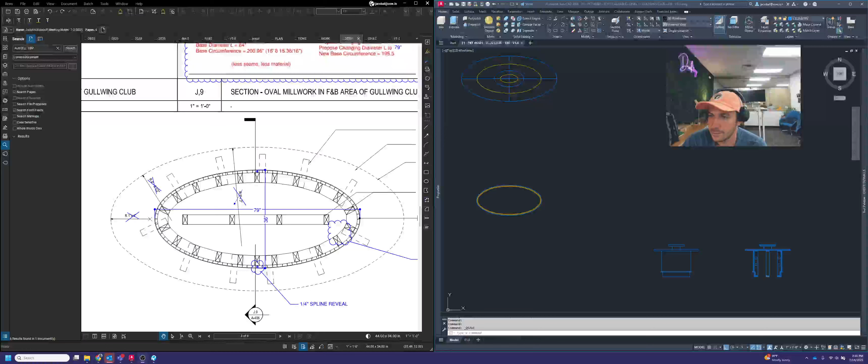All right, we are going to finish this one out. We've got our 2D section view drawn up, and our plan view kind of slightly detailed out. This may take another part or two to get through the entirety of it, but the goal for this video is taking that section view and turning it into a three-dimensional object that we can use for our drawing.

We did mention this previously, but I want to bring it up one more time. Anytime you plan on making a 3D model off of a 2D drawing, like what we're doing here today, you need to make sure that every single part you're going to be making in 3D is a closed polyline.

That can be a little tedious at first, but we're going to remove any hatching here. I just exploded this block, making sure I have the full plate. Just like we did over here, you can see that bottom plate sticks into that rib a 1/4 inch and the rib sticks into the bottom plate a 1/4 inch. So I'm using that block that we used to make the die wall, and adjusting it here and there slightly to make this work.

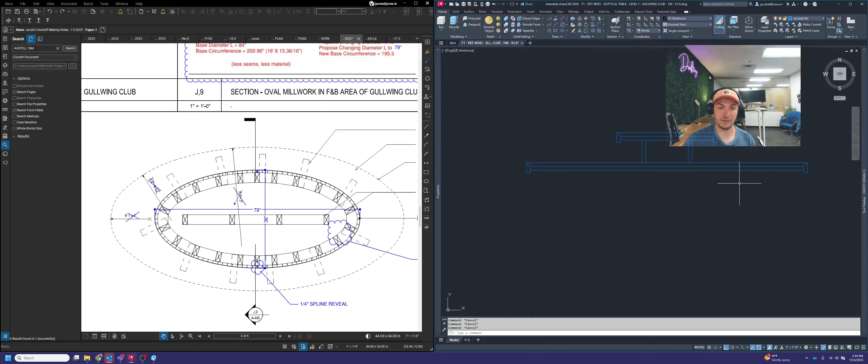Like this. Okay, and then when you have that complete, where all of your lines are touching each other and everything's closed up looking, what you want to do with that information now is use your bpoly command. Again, that's bpoly, like the letter B and then poly. You go into there, hit pick points, and you're going to select all of these points here.

All right, I left this spot intentionally blank for right now. We're going to actually adjust that too. So for something like this, how tall is this? We got to check something here. It's about 4.5 inches tall. Just trying to think out loud.

What is going to be the most beneficial thing we can do to build this out, to frame it, to make it actually stable? I'm tempted to make this a ladder frame, because of how small it is. I think that may be the best approach. Why don't we start by thinking about it as a ladder frame?

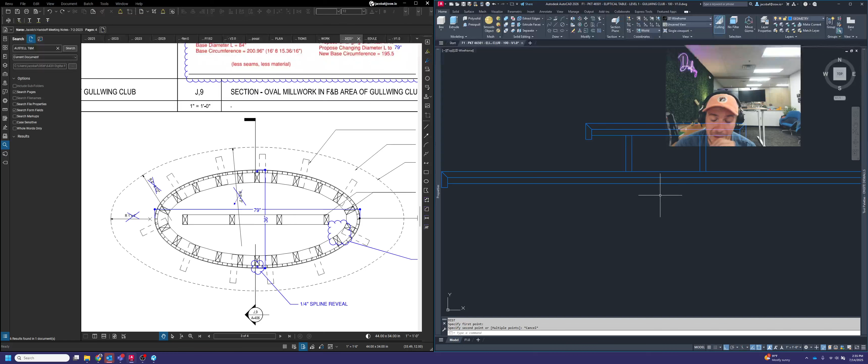And what I mean by a ladder frame is kind of like taking a die wall and flipping it on its side. So to illustrate that, if I take this plan view of that area, so these are the panels that are below that countertop, and I offset that in 0.75. Again, this is just to illustrate it, you don't have to follow along with this.

What we're going to do is take a line and offset at 0.75. And we need to raise that up. So really that's kind of give or take, it may not be perfect. I might actually end up changing this a little bit more.

I think I might. I think I'm going to. I'll bring that other line in 3/4 of an inch. So right now, that's our panel line. This would be the outside loop of our framing, which again is kind of arbitrary, it's not exactly right yet. So I'm going to see what I can do.

This is going to be a very small place to put framing, so I'm going to do my best to try to make this right as much as I possibly can. But it's going to be very, very small in here.

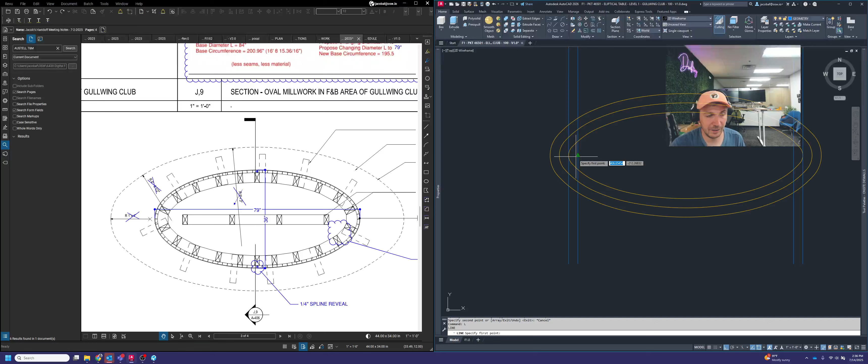If I have a rib here and a rib here drawn in blue, what I want to do is use the line tool in combination with mid between 2 points. I'm making sure that I'm drawing a path that goes from the center of the rib on the left to the center of the rib on the right. Then we're going to use the array path command to array this across.

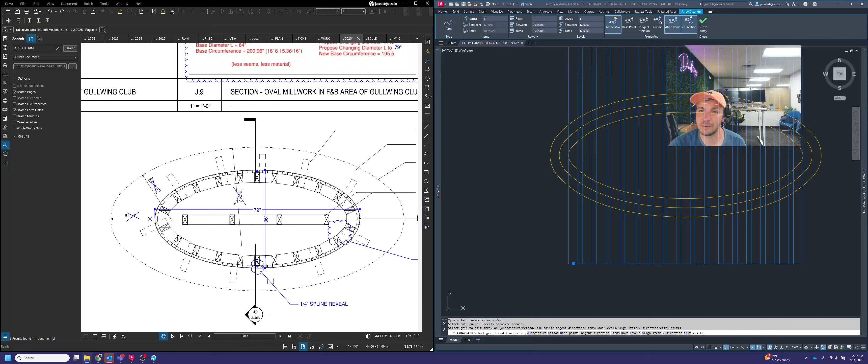One thing to keep in mind is that we're going to refer back to our drawing from earlier, from the die wall training, where we talked about how to handle rib spacing on a die wall with curves. Let me pull that up again real quick, since we're going to need it again in a minute anyway.

Curved panels, curved die walls. Here we go. All right, when it loads, there it goes. So again, we looked at this the other day. We're dealing with a curved wall, and I will assume at this point that we're using 3/8 bending stock for the wall.

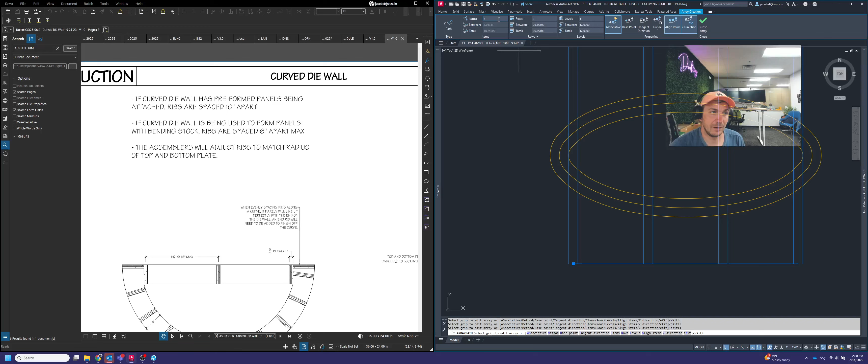If we assume that, we're going to use the rib spacing of 6 inches apart max for that. So when we go up here, we're going to switch this to divide. Then we're going to make sure that our ribs do not go past 6 inches apart. Right now we're just barely over, so we're going to put one more rib in there.

Now it seems like overkill — these are only like 4.5 inches apart. But honestly, it's better to have more than to not have enough here. So what I'm going to do is trim these back to show you what that ladder frame will look like. Typically, when you have a ladder frame, you're not dealing with a curved face like this.

This is kind of goofy, but we have these ribs here, so we've got 5 in total — these are spaces in between, 4 spaces between, 5 ribs total. We have a piece here that's 3/8 bending stock, double layered, making the outside perimeter of this. Then you have your panels covered in that MT1 or ML1, in our case, for the outside — these panels on the outside of that.

So that's kind of how I want to go about framing that. I know it's probably not the best thing in the world, but it's probably the best I can do with what I've got here. So if I'm going to draw that as if I'm framing it that way, what I need to do is draw in those 2 layers of 3/8 bending stock.

In this case, we can draw it as a 3/4 inch thick block of material, so 0.75, and make sure that it's not going into my countertop like that. So again, I'm using the rectangle tool to be able to do that.

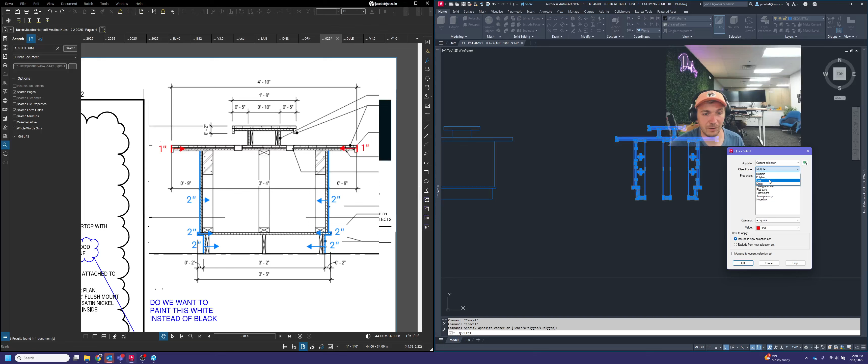And then we're going to delete those lines. As long as everything is a closed polyline now, or a circle, that means we are good to move forward and start making our model. So here we go, here comes the fun part.

So when you're dealing with a model, especially if you're sweeping, a real important thing to remember is that I'm sweeping this and it's a weird shape. Because of that, I need to make sure that whatever I'm sweeping does not intersect itself as much as possible. If AutoCAD senses that an object is interfering or intersecting itself as it's going around a curve, it'll probably give you an error code.

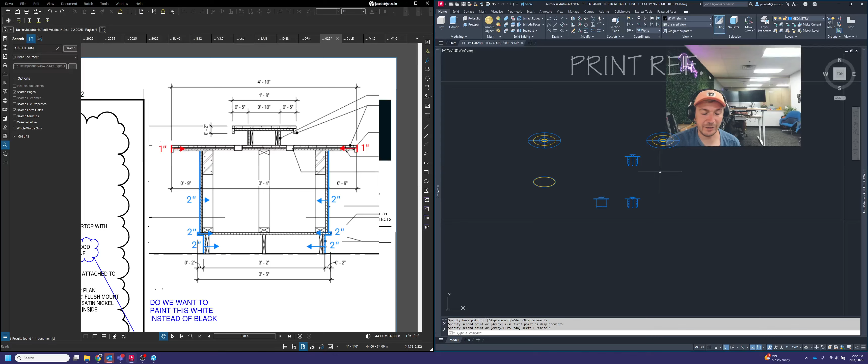In that case, we might have to try a different way to go about modeling that table. So right now, what I'd suggest is we start with our section view that we just made. So we're making a copy of that off to the side, and we're copying our top-down view. Then we hold down Shift and our middle mouse button and go into an isometric or axonometric view where we can see everything at an angle like this.

You can also click on the corner of your view cube if you prefer that. It doesn't really matter too much, but it's just a way to see multiple planes instead of just the two X and Y planes. You want to see X, Y, and Z here, over here like this.

So we've got a copy of our section view. That's perfect. What we're going to do now is get ready to sweep this. Going back to what I mentioned before about making sure this doesn't intersect itself, probably the best way to do that in a case like this is you probably want to...

Almost take half of this section view and paste it off to the side. So let's do that. I'm going to have to redo some of my B-polys, but that's okay. What I'm doing here is trimming anything that's outside of this middle. And I actually don't need these ribs because they're not going to be curved.

There's going to be a straight run of ribs in the middle, so I don't need to worry about those. Anything past that line, I'm just getting rid of it altogether. It's not needed, I just need what's over here on this side essentially. Anything I had trimmed to this line, I now need to close these polylines.

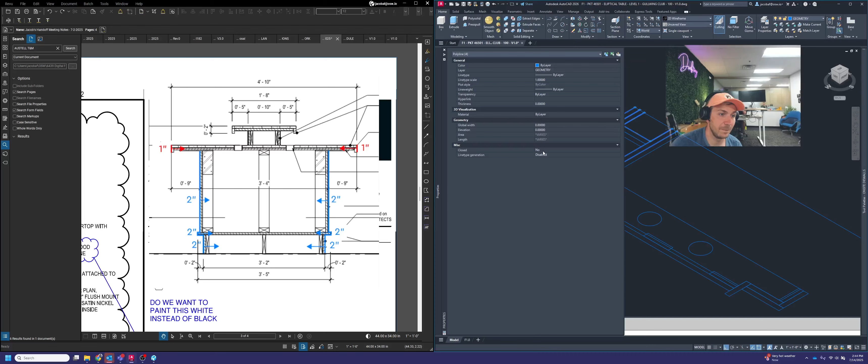Okay, it looks like it did it. Sweet. So now that we have that, we need to flip our section view so it's facing the right way. I'm going to make another copy of that too, not to be paranoid, and I'm going to save too. Good idea when you're working in 3D, probably save often enough so you don't lose any of your work, especially if you're putting a lot of time into it.

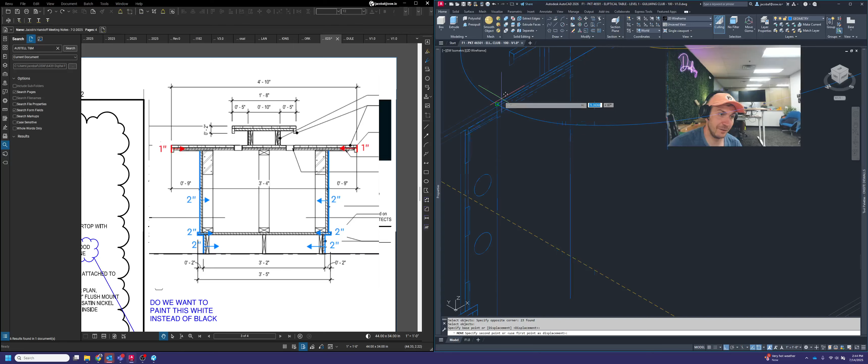So let's use the 3D rotate command, and we're going to rotate this section view, only the one. We're going to flip it so it's standing straight up and down like this. Then I need to move that section view so it's lined up with the edge of my counter right there.

Shoot, I just realized something else too. I'm going to have to do two different sweeps because I'm not going to be able to do this with the one here by itself. I need to do this separate from this one because this one is a different curve than this one at the top. So that one at the top, let's just leave it be for now. I might actually even delete it just for temporary purposes right here.

And I'm going to use... man, oh man, this is getting real complicated. Okay, so I take that back. I need to actually do maybe 3 sweeps even, because this wall should actually be in line with this yellow profile here, okay?

And if I go back to my top-down view, you can kind of see what's happening. As the table goes around, this actually grows in depth and this shrinks in depth. So that means I'm not going to be able to use the same sweep path for everything. But at the end of this, it's all going to come together though.

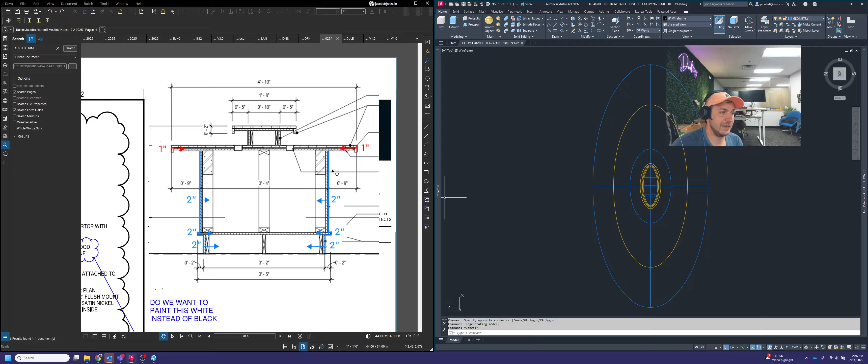So you can even see proof of that here. This is 18 inches at this depth. And then if you go over here to this section view, they show that at 9 inches in depth. So they're actually intentionally making this not line up, which is kind of weird, but we can work with it.

First things first, because we want to sweep these as separate entities, let's go ahead and focus on one at a time. I'm going to sweep the die wall here first. So highlight just the die wall. Do not select anything with the countertop. Just highlight the die wall.

Hit enter. It's going to ask you to select a sweep path. But before you do that, anytime you use the sweep command, please remember that you always want to make sure these two settings are correct down here. So the first one is alignment. Alignment is always going to say no.

If alignment is turned on, or it says yes, what will happen is AutoCAD will try to automatically align your section view to be perpendicular to that curve. Sometimes it doesn't always do the best job of that. I've had it sweep an object flipped upside down or mirrored backwards, or it does some really weird stuff. So because we've already aligned it to that path, we don't need it to automatically align it for us. So we're going to say alignment, no.

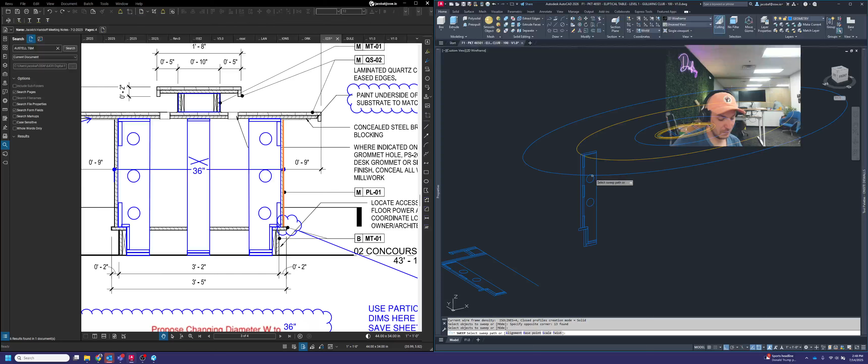All right, so sweep. Select your die wall and all the components related to that. Say alignment, no. And base point is going to be where that profile meets the path. So right there.

Now you're going to be able to select the path. And as long as everything goes according to plan, it should generate a 3D model of your die wall. Now let's just make sure it actually worked. It may have had an error, so I'm going to check and just make sure. Yeah, I think I might have had an error on mine, so let me try it again.

See, unable to sweep 13 selected objects. Okay, why don't we try this then?

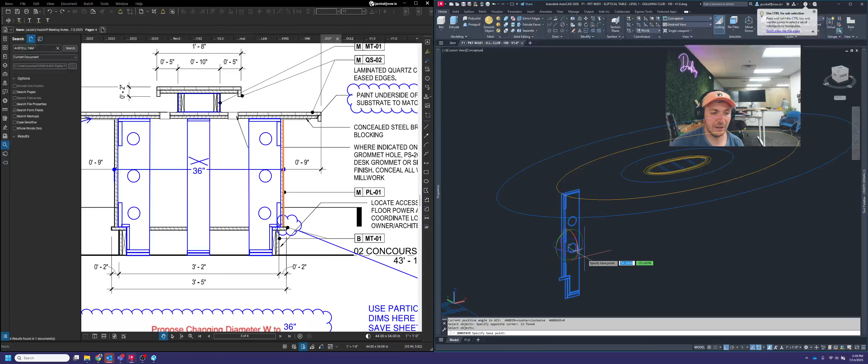Why don't we try to do a 3D rotate on the die wall. And then we're going to move this die wall to be at this corner here and try it from this side and see what happens. It may still fight me on this because this is a very tight corner here. And when it starts to overlap, then it starts to become an issue.

If it still does it, okay, actually it looks like it worked. Okay, well how about that? We got it to work. Okay, nice. So I guess just changing the way that profile was stacked on the path was enough to be able to trick it into working. And sometimes you got to do that with AutoCAD. You have to baby it sometimes because it doesn't always do what you want it to do on the first go.

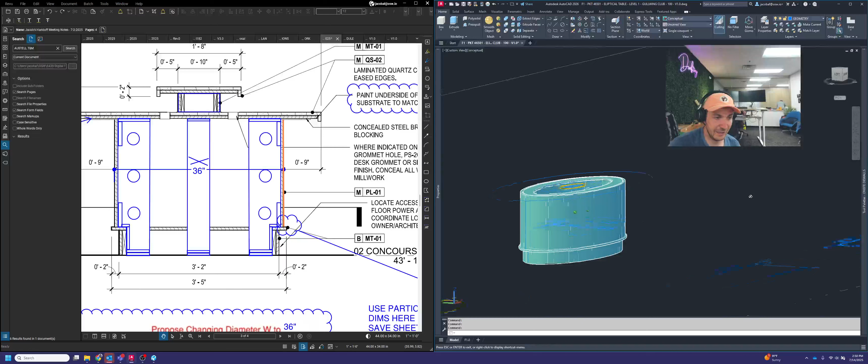So, all right. Now that we have that, our next objective here is going to be to start working on the next portion, which is the countertop. So the countertop, again, we're going to try to use the sweep method on that as well and see if we can get it to work. If we cannot get that to work, then I have other methods we can give a shot to. So we'll do that one.

We're going to copy the countertop components here. We're going to paste those over to the side. And then just like before, we're going to use 3D rotate to align these to be standing upright. So like this, and then like that. So that way we're facing the long side of that path.

Okay, and then what we need to do is just move this set of objects over to our path. So using that corner there to this corner there, just like that. I am also going to raise this up so that way it's not intersecting the framing that we have down below. So let's go 1.5 up.

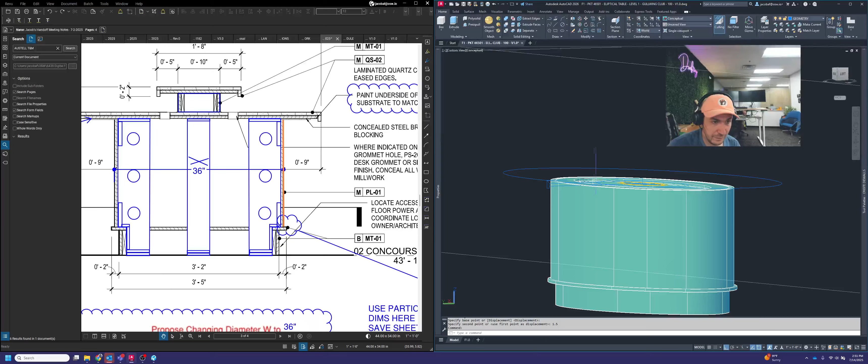Okay, that looks really good. Now let's give it a shot and see if it works. So here we go, sweep. Oops, sweep. There we go.

Select your objects, don't select your path there. Go ahead and enter, then select your alignment and set it to no. Your base point, select that corner there. Now we can select our path, and it says that it's got a problem.

Okay, quick way to fix that. If you're dealing with a shape like this, sometimes it helps if you bring that countertop in a little bit. It's going to sound dumb because you'll end up with a hole in the middle of your countertop, but I shrunk the countertop in closer to the path so it has less chance of overlapping or intersecting itself as it goes around.

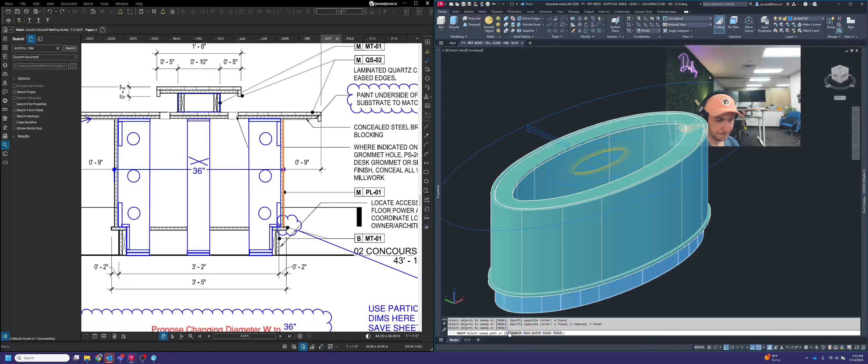That way it does work occasionally. It may help with tricking AutoCAD into making this work. And then I'll show you a nifty way on how to make it actually work right. So we'll bring this a little closer and try it again.

Man, it's still fighting. It really doesn't like this path or this set of objects for some reason.

But like I said, if we can't get sweep to work, there are other ways to make this happen. I just like sweep a lot, I think it's one of the more convenient tools in AutoCAD for this type of thing. Oh, it says it's not coplanar, so let me try something here.

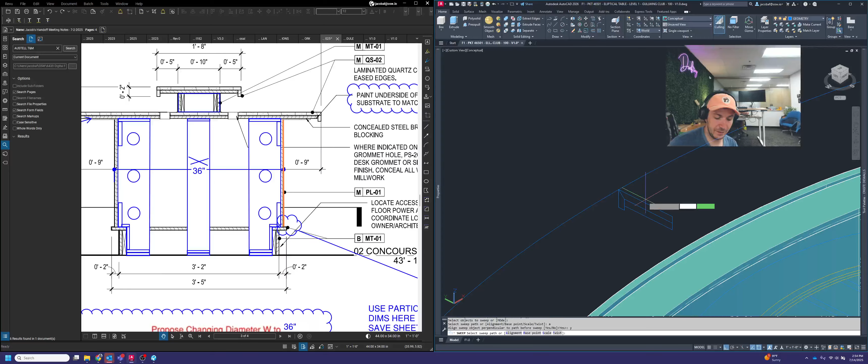It looks like it's lined up perpendicular to the path. Let's try it again. Let me try it with alignment turned on and see if that does anything different. Oh, for some reason that worked. So we were able to make that happen.

Now, when it comes to the middle part here, we have some cleanup work to do, because you can't have a hole in the middle of your countertop like this. So we got to fix that.

To fix that, let's just go ahead and isolate these two parts, the rings around Saturn here, so isolate those guys.

Then we can do a couple of different things. Let me try to think what's going to be the most efficient way to fix this. Let me try this method first: there's a command called solid edit. Solid edit is a command that lets you essentially edit solid objects in AutoCAD.

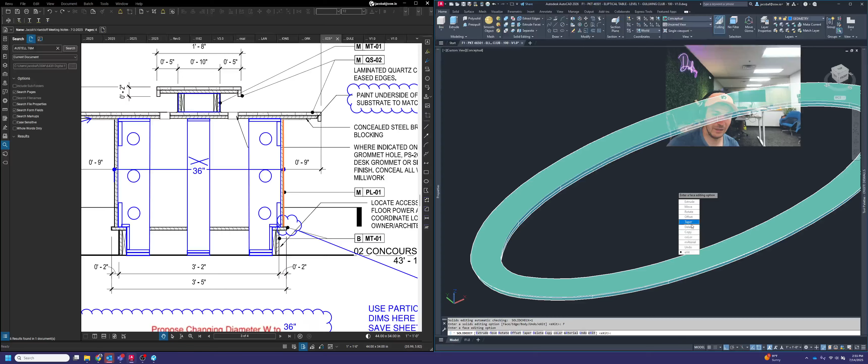Now, if you have something like this and want to remove the middle, sometimes you can go to remove face and hit delete, then go around and select the parts you don't want. As long as it doesn't break AutoCAD, you can actually turn this back into an elliptical shape.

Let's try it and see what happens. Hey, look at that, it worked out just fine. Okay, so that was solid edit, and solid edit will work for this.

So we're going to use solid edit again, and we're going to say face to remove the inside face, and then hit delete.

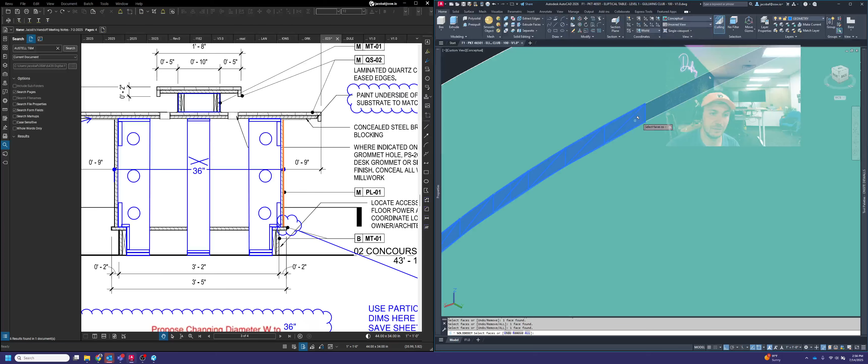Oops, let me try it again. I want to make sure I'm only selecting this face, not the top, because we don't want that. Man, it's fighting me here. All right, I'm going to have to isolate just this part by itself and then try it again.

There we go, that's a lot better. Look how much smoother that is.

Okay. There we go. Okay, so now we've got our elliptical shapes.

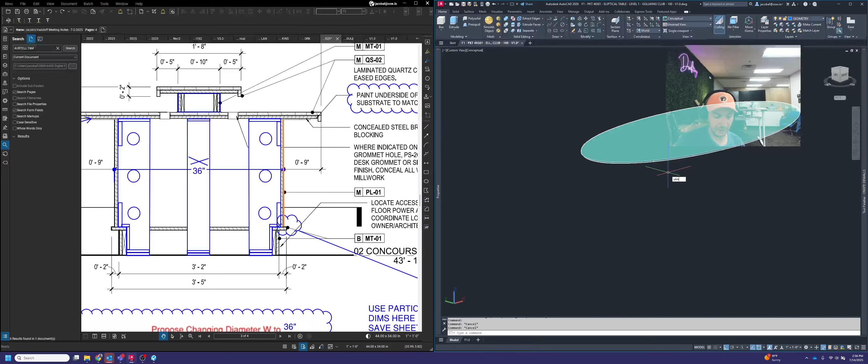We can unhide and bring back all of our objects. Okay, so now we're actually looking pretty good, got a surfboard looking table here. It's looking real nice. So what's left to do is get that top piece modeled, the upper counter, the small counter there, and then after that it's a matter of getting our ribs all placed, our vertical entities placed inside the die wall.

So let's see, what are we doing for time again? Let me just check to make sure we're good. We're at 26 minutes, so we're right on track. Okay.

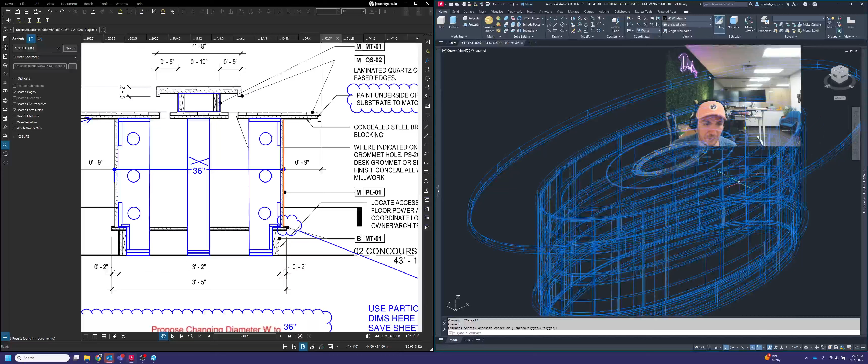If you're ever trying to get back to your 2D lines and can't really get to them, you can always switch your visual style to 2D wireframe. You'll be able to see everything happening in 3D, but also select lines, like this one here and these here. These are the lines we drew to make that small upper counter piece.

I want to make sure I raise these up enough to get to them in 3D. My countertop is 1.5 inches thick, so if I move them in the Z direction 1.5 inches, I should be right in line with the top of my counter. It's hard to see, but it is. Now if I go back to my conceptual view, you can see that's what happened.

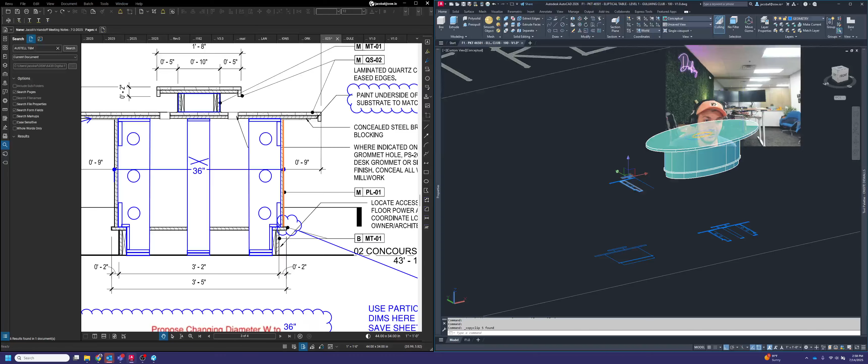So now those lines are sitting on top of my counter where they need to be. We're going to take apart another portion of our section view here to start working through the next part of our framing. So I'm copying these — that's this part of what I'm dealing with here.

I need to 3D rotate these again, face them straight up and down, and then make sure they're facing perpendicular to the long part of my curve.

Then, using the move command, I'm going to use this corner here to line it up with the corner of my ellipse here.

You're probably thinking, why'd you do that? Because now you can't get to it. Well, I'm going to be able to get to it — I just need to raise it up enough to be able to get that working. So it's 6 inches tall.

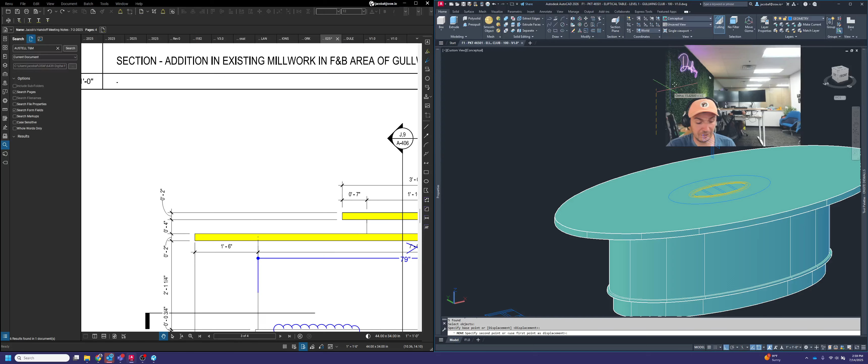I selected those objects again using the move command, hit enter, and when it asked to select objects I typed PR and hit enter, which lets me select the previously selected objects. So now I can raise this up 6 inches so it'll be sitting right on top of that counter, just like that.

Let me double check to make sure this dimension here and this dimension here are supposed to be the same and don't change. It looks like they do change, so just like before with the larger table below, we need to sweep these in two separate parts.

So let's isolate just those parts since it does look like we need to do that here. Let me check to make sure this is drawn correctly first — 5 inches there and 7 inches there. Okay, so that's actually right.

But again, you want to make sure we're sweeping these in two separate parts because they're going to be two separate profiles or paths. Like what we did before, we probably need to bring these out closer to the edge, so I'm going to move that 6 inches over towards the edge.

Then I'm going to use my sweep command again. Highlight those 3 parts, hit enter, set my alignment to no, set my base point to there, which is technically where the two parts meet, and then click on my line here. You can see it did in fact work this time, which is great.

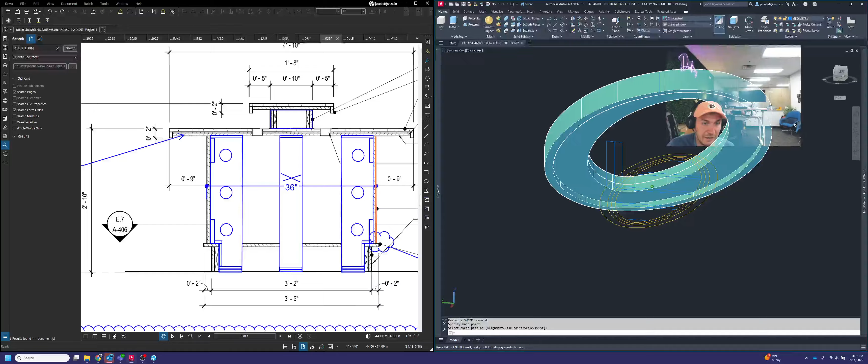But we still have to do that solid edit trick to fill in this hole in the middle. So we'll go solid edit, click on face, then delete. You just do a lap around your profile and delete that inside face, which closes up the object and makes it one solid elliptical shape.

We've got to do that one more time here — face, delete, and do another lap. I've got to do the same thing we did previously, so I need to isolate this again, just that part by itself, and then do the solid edit trick: face, delete.

We're going to go around, make a lap around here to get rid of that inside. Another alternative method you could use for something like that is a solid object - you could fill this in with rectangles or circles however you need to do it, then use your union command to combine them into a solid object again. You might also be able to use the press pull command to fill in that space with a new profile that matches the exact inside of the shape you're dealing with.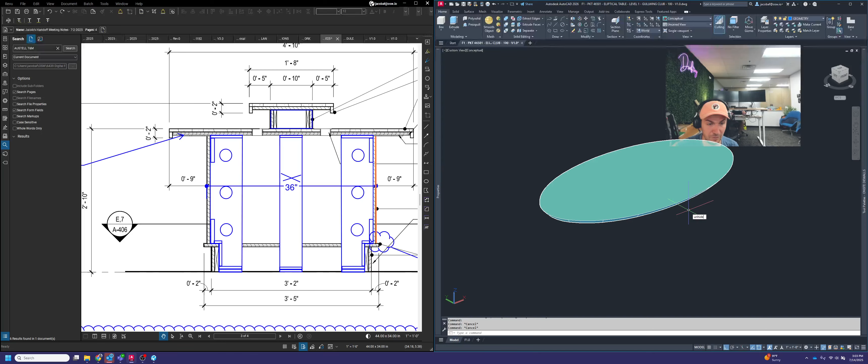There's a few different ways you can go about it, and probably other ways too. Just a few to think about as you're working through things like this, because those are some methods you can use. But there's always going to be other methods out there too - there's no harm in trying different ways to model something.

Right now what I'm doing is hiding every object except for the two I'm trying to sweep here, these two rectangles. I'm going to use that sweep command again. Alignment, no. Base point being right there. And I'm going to select that profile.

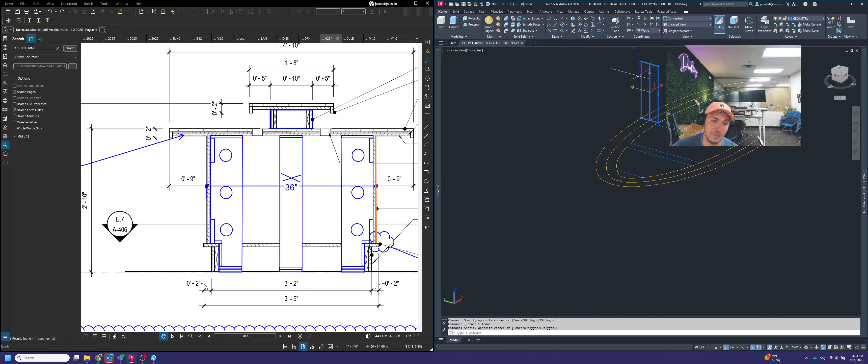Now it says unable to sweep. Again, if that happens to you, don't sweat it - a couple other ways we can go about it. If we are unable to sweep that, we can also erase the thing we are going to sweep, and actually use press pull to bring these up.

So kind of like that. If you hover over an object with press pull, it usually will do a pretty good job of finding the shape. Every once in a while, like right now, it's kind of fighting me on this because I got a lot of other stuff in this model space. I'm trying to isolate these parts. There we go.

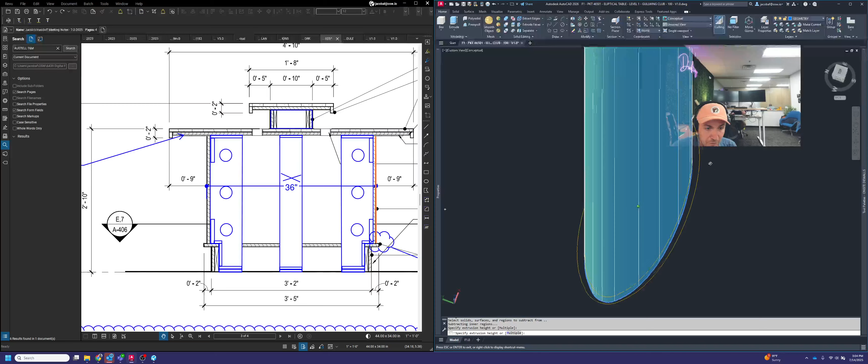If I kind of go from my top down almost and go straight like this, I can select those parts together. Let's see how tall this is - it's 4 inches there. Actually, let's see, so 4.5 inches tall, I'm sorry, because half of it's kind of hidden underneath the countertop. So 4.5.

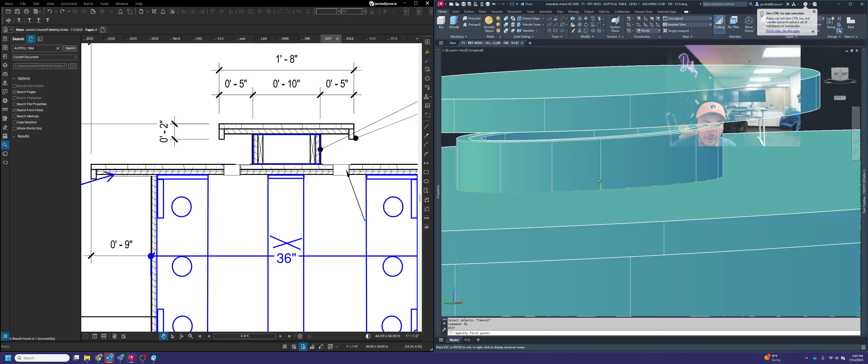Okay, let's unhide our parts. And it looks like these need to get raised up a little bit. Let's see about how tall they need to be raised up. So I'm going to use my DI command, and I'm going to select a point on the top of this, then select a point on the bottom of it - it's hard to get to, but on the bottom of here.

And it says, if you look at the 3 dimensions it gives you at the bottom - X dimension, Y dimension, and delta Z. Delta Z is the dimension we're looking at because that's the height change from the top of that panel to the bottom of our subtop. And that looks like it's 1.5 inch difference. So we're going to highlight those 2 parts and raise them up 1.5 inches, and now they should be touching the bottom of that subtop, just like that.

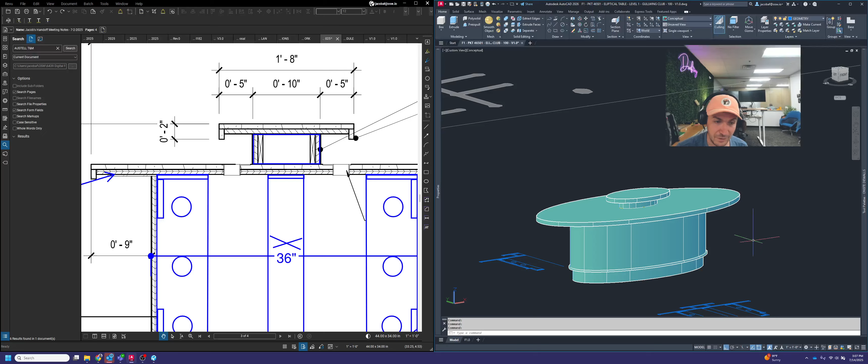So for us, what that means is we're going to start back at the bottom of our table like we did the first time. I'm going to try to isolate only those objects, hide those 2D lines that are right there in the middle, get rid of those, hide objects. Okay, so we're left with the framework and the panels on the island.

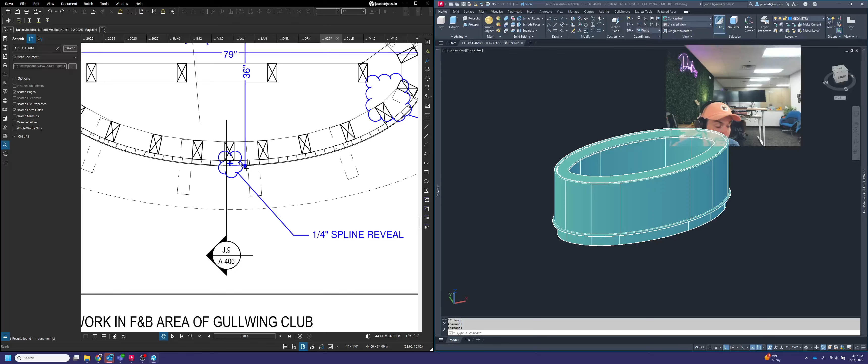Okay, so we got a couple things to do. We do know, based on that email we saw earlier, that we are going to be doing a quarter inch spline reveal here at the long side of our island, like this - that's going to be on the long side here and the long side there. So we're going to add that in. We need to find the midpoint there, just like that, taking a 2D line and drawing it straight off of that midpoint. We're then going to offset that line 1/8 or 0.125 inches to the left and the right.

Since I've offset those, now I'm going to use my slice command to chop this in half here. Starting with the right line like this, take it straight out, hit B for both, and then do that for here as well. So slice.

Once you're done selecting objects, select your 2 points. I'm going to take that endpoint, point randomly over here in space, and then I can either type B or pick the side I want to keep. If I pick the side I want to keep, I'll click on the endpoint over here. You'll see now there's a gap there between those panels.

All right, so that'll work. Now we got our 1/4 inch reveal. If we want to go a step further and make that a real reveal, like a 1/4 inch spline, we do need to draw that spline in.

So that spline is going to be 1.25 by 0.25 deep. What I'm going to do to draw that is use the box command up here. Sorry, I kind of skipped over that. The box command will let you draw a rectangular prism in space. So you're going to click that.

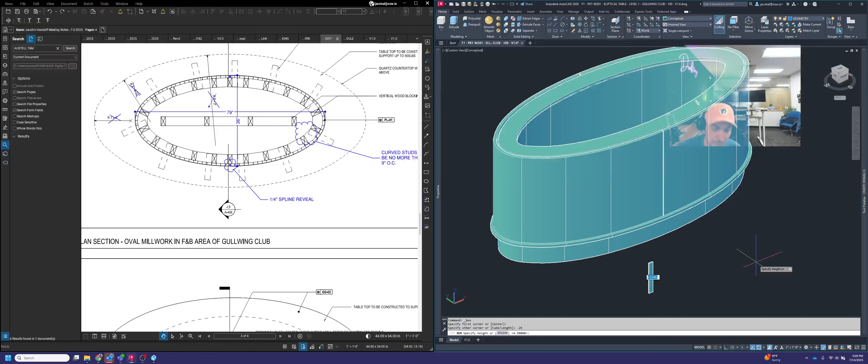And you're going to type in one side, which is the long side, which is 1.25. Hit the tab key on your keyboard, which will allow you to start dropping in a dimension for the other side, the short side, which is 0.25 on all spline reveals. So 1.25 by 0.25. You can make it as tall as you want it to be.

I'm going to make it an arbitrary height for right now because what we're going to do is place it where it needs to go, and then trim or slice the part that we don't need off of it.

All right, so to do that here, let's start at the top. We're using the move command right now to move it to where it needs to go. So shift right click, mid between 2 points. Again, using the move command, I'm taking these 2 points here, and I'm going to place this spline right between those 2 panels like that, using mid between 2 points to line that up nice and perfect in the middle.

Now that I've done that, I can use my slice command. And this time I need to use a 3-point slice because I'm chopping this at a non-XY top-down view. So I need to go down here and select 3 points.

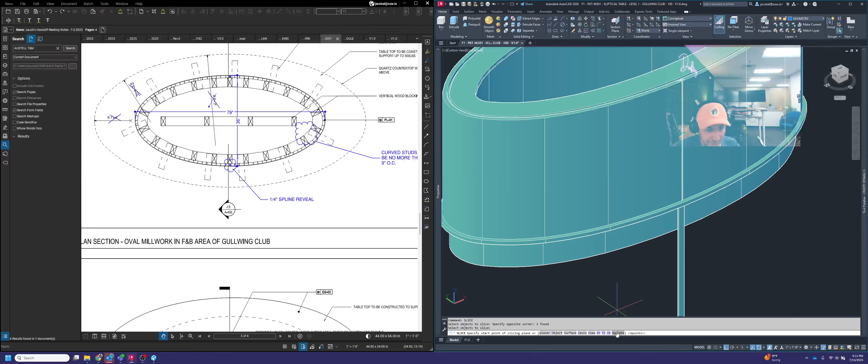I'm going to pick a point here at the top of that metal trim where I want the spline to stop, come out to here somewhere in space, and then draw a line out here somewhere in space too. Because what I'm doing is making a cutting plane that I'm slicing through that object in space. So those two lines were what drove the cutting plane, the two sides that I'm cutting to get that to work.

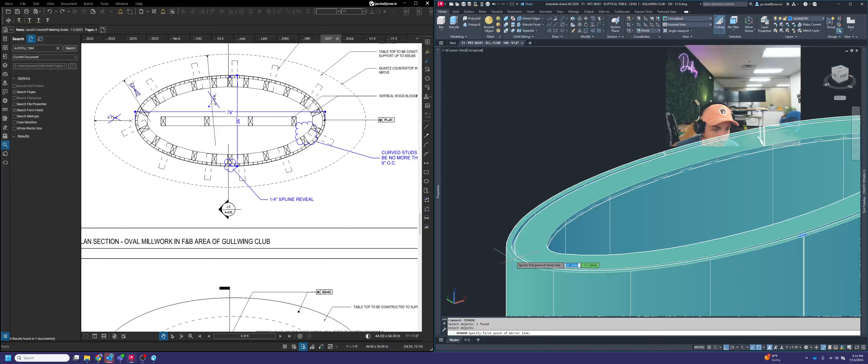Okay, now what I need to do is mirror this over. You can either use Mirror 3D or the standard regular old mirror, and mirror that across to the opposite side of your island. When you do that, please be sure you're using a point that's in the middle. So maybe Mirror 3D or 3D Mirror is going to be the better bet here. So let's go use that spline.

We need to find a point here. Again, I'm drawing a plane in space, so I'm going straight across the middle of my island and straight up. That way, when it's mirroring, it's flipping it across that plane.

Then what I'm going to do here is also copy these 2 times. 1, 2.

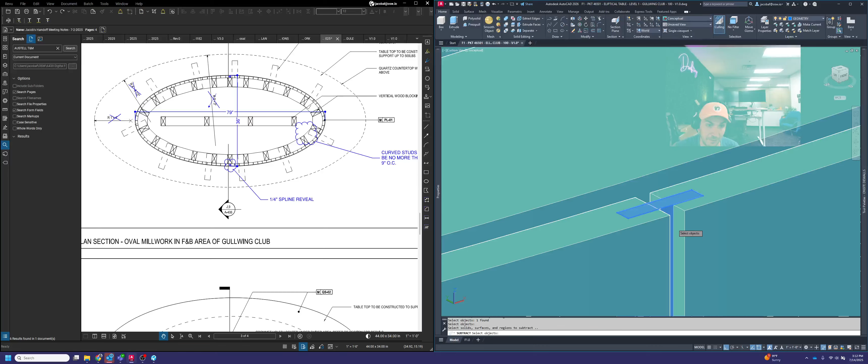What I'm going to do now is use my subtract command to subtract the spline from this panel and this panel. Every time you use the subtract command in AutoCAD, you start with the panel, hit enter, and select the object you're removing from it. AutoCAD will delete the part used to remove the geometry, which is weird, but if you have multiple copies of that spline, it won't delete the original.

Well, I mean it will, but you'll have an extra one just in case. So I make two copies of that since I'm subtracting it twice.

And then from there, let's see, time frame again. Where are we at? I always lose track of where that clock is. Okay, we're still doing okay.

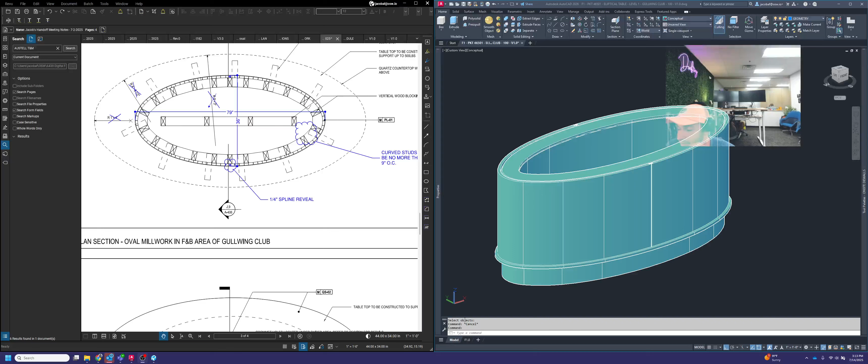42 minutes in, so let's dig into the ribs next. For the panels, we put in our spline reveal, we're good to go, so I can hide those now. I'm going to hide my panels, and I'm also going to hide anything that doesn't pertain to the ribs or the framing. So these trim pieces on the outside can go away.

Now is it maybe a good time to start utilizing some of your layers in AutoCAD. If you're working in 3D right now, it's hard to tell what's happening here—this kind of looked like an orzo noodle or something. So what I'm going to do is go up to Layer Properties.

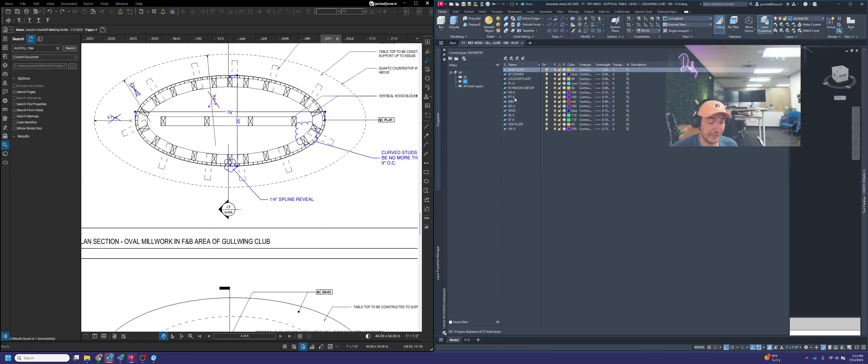In Layer Properties you'll see there are three groups: 2D, 3D, and all used layers. If you go down to 3D, you'll see there are some predetermined layers already set up that you can use in your model to help differentiate what parts belong to what. So you can start setting up these layers just like this.

So this will be the ribs. Again, it's kind of hard to see what that is exactly, but if you think back to that section view we were looking at earlier, that's these guys. Because we have the nailers sitting on the front of that rib—that would be these guys here.

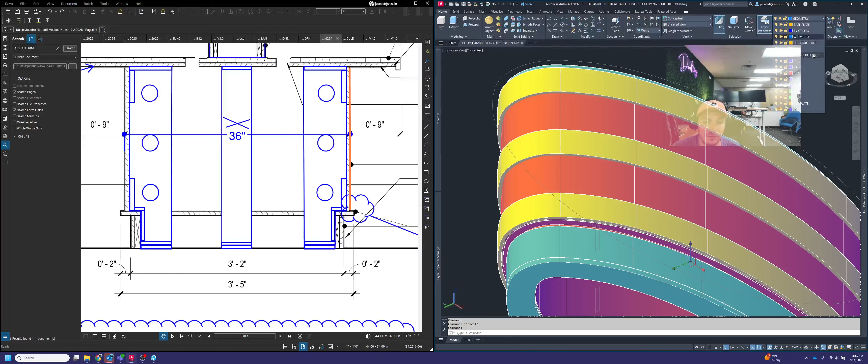And those I'm going to label as plywoods on top just for right now. I might make a separate layer for nailers though, because that way it doesn't get confused. This here is going to be that piece right here.

And then we have the locator plate at the bottom and the base plate above that. So let's get those on the right layers: locator plate at the base, then the bottom plate right above that, or base plate. Then you have your top plate at the very top of your ribs up here, so we need to put that in right there, top plate.

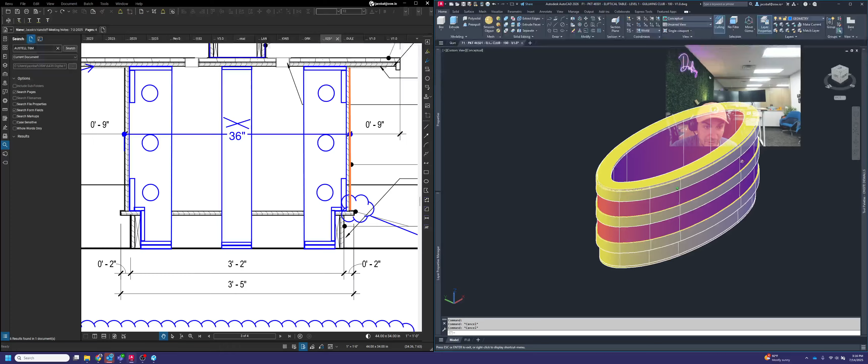So you can kind of see now, at least it's a little easier to see what's happening. The red is your ribs, the yellow is any type of plywood framing like the top plate, bottom plate, locator plate, and then the nailers and the plate that's sitting right here.

Okay, so now that we have that, let's go ahead and isolate just the rib layer. I'm clicking on the ribs and I'm going to click on the stack of papers up here to isolate the ribs themselves.

Now what we want to do is break these ribs up. As of right now, this is one massive solid object, so we're probably going to end up slicing these, or we can use press pull, one or the other—we'll figure it out as we go. But in order for us to do this, we need to draw another ellipse.

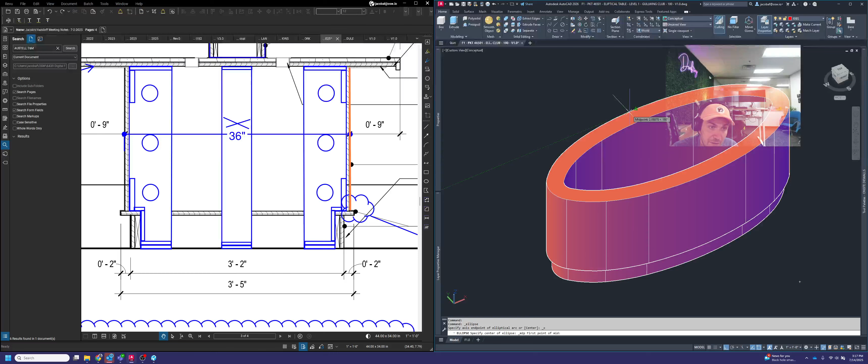So what I'm going to do is find the middle of the ellipse we already have drawn. Okay, so I kind of just drew that ellipse in—it's a little hard to see, but it is there. From there, I'm going to go mid between two points here, so from there to there, and draw this line straight across as if I'm using that to chop right in half in the middle of my shape.

What I'd like to do from there is, remember how we put that reveal straight up and down here in the front? For me to be able to draw these ribs in, I want to actually trim half of that ellipse off of here. Might seem kind of weird, but we're going to use that here in just a moment to do something kind of neat. Then we're going to offset that straight line 0.75 over here and over here.

Okay, because we're building this in two separate frames or two separate die walls instead of just one big one, we're going to split it in half. Half of it will be on this side and half on the other side of that table. So when you have two die walls that meet together, you want to have a rib that butts another rib, so we have two ribs sandwiched together where the die walls meet, just like this. That's what I'm trying to represent here.

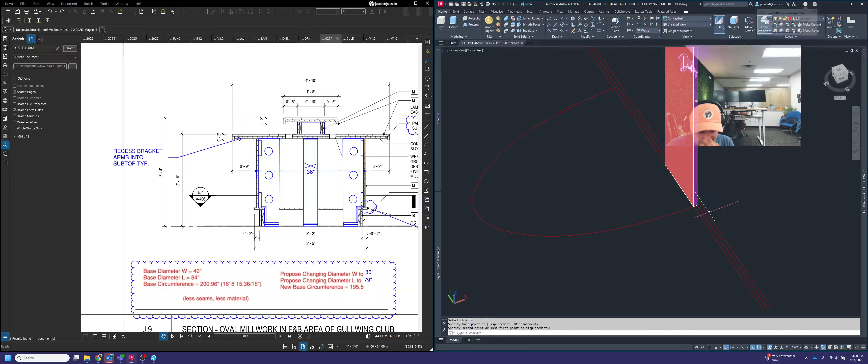Now I need to move that right there, so it's in line with where my ribs are theoretically going to be. I may even shrink this in a little bit. I don't want to go too far because I don't want it to not overlap the ribs we're drawing. I'm going to make this 5 inches wide here, or I guess it's 7 inches wide, as you can see.

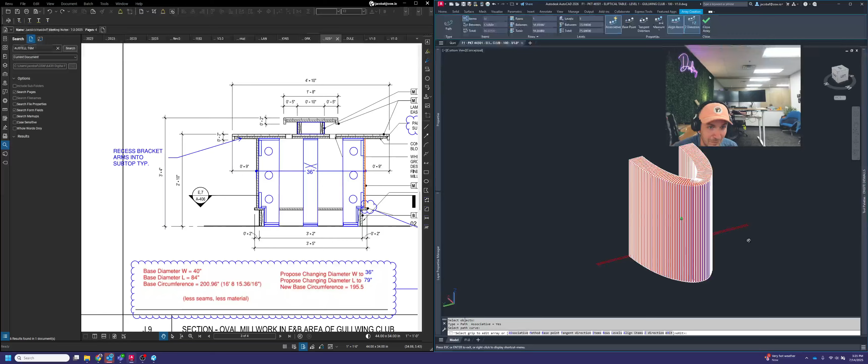We'll try to do an array path on this here. Oops, path, there we go. So select your rib, then hit enter, and then select your path. You can see it does a crazy number of ribs in there. It looks like something out of ancient Egypt almost, but we're not dealing with that.

We're going to get rid of this, and go to our die wall instructions here, and let's pretend the outside of this will be wrapped in a bending stock, which means our ribs cannot be any further than 6 inches apart. So I'm going to switch over to divide, and start messing with my quantity of items until I get below 6 inches in between. Right now, if I leave it where I have it, I should be okay.

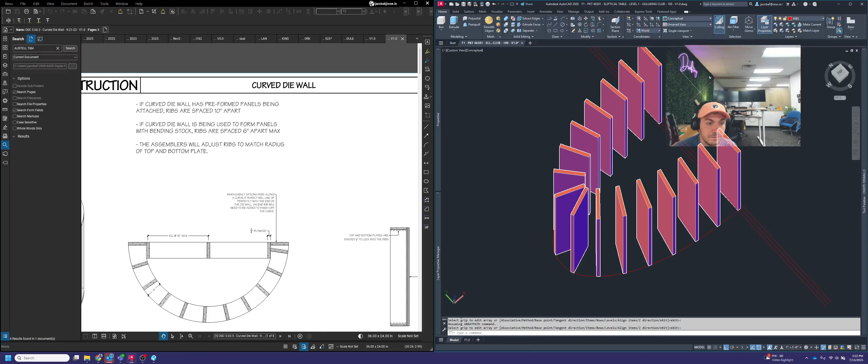When you're done, you should probably explode those ribs so they don't overlap, or so you can get them to be subtractable later. Or actually, we're not going to subtract it, we're going to use a new command called interfere, and I'll show you how to use that shortly. Interfere is pretty nifty for something like this, because you can generate all of your ribs at once with the geometry you have here.

So right now this looks pretty crazy, but this is going to work out just fine. We're going to leave it as it is. I'm going to delete these extra lines we don't need anymore, and then we're going to unhide.

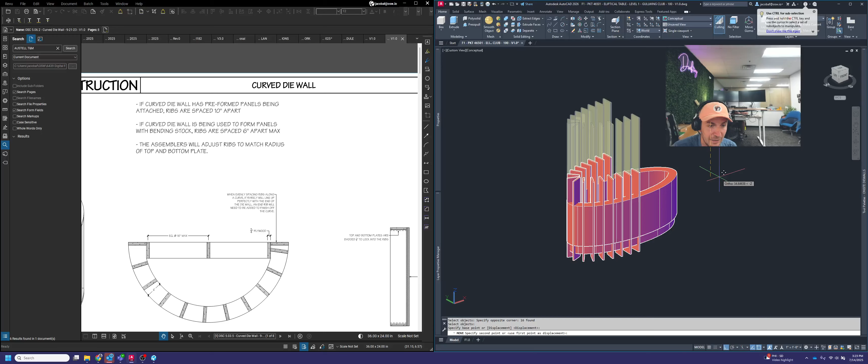I'm going to bring these down so they intersect my current ribs, or that giant block of ribs I have here in my model. Then before I move any farther forward, I'm going to slice these ribs in half. I really don't need these anymore, I can delete them because we're going to mirror these over once we're done.

So, interfere - just to show you how that works. Interfere is a pretty nifty tool in AutoCAD. It's usually used to check parts to make sure that they don't overlap. But in a case like this, you can use it to generate your ribs using the dummy ribs we just built along with the actual legitimate solid block of ribs that we have.

So we're going to use interfere. It's going to ask you to select one set of objects first, then hit enter. We'll start with the solid rib, hit enter, and then it's going to ask for the second set of objects, so we'll select the dummy ribs and hit enter.

On my side screen, this showed up - a little sub-menu. When you're using interfere, it's going to tell you how many objects interfered with each other, and it's going to ask if you want to delete the interference objects created on close.

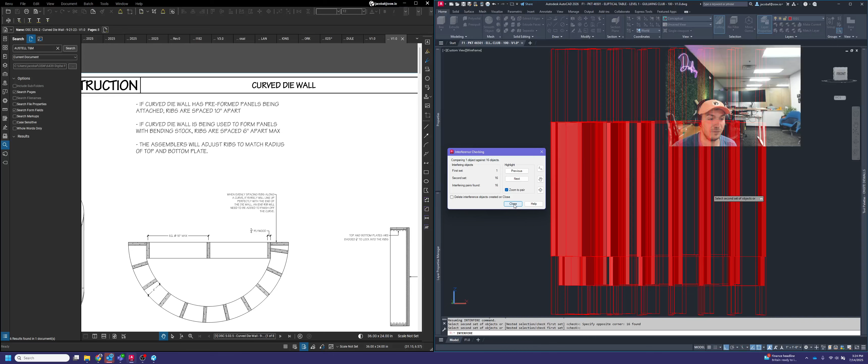Normally, if you're using this to check something like gears to make sure they don't intersect, you probably wouldn't want to keep those. But in our case, what we usually do is hit uncheck, making sure we keep the interference objects that are there - we don't want to delete them. Then we hit close.

Now what we can do is delete the solid block of ribs and delete the dummy ribs that are up here.

That actually worked out pretty well, except the wire chase didn't show up for some reason. So I'm going to go back a step before we did the interfere, and go back a little further. How about there? Okay, that'll work.

So I kind of forgot about this, and this is my fault - the circles that we drew in the section view are actually separate from the ribs. They need to be subtracted from that rib set first before we can do the interfere.

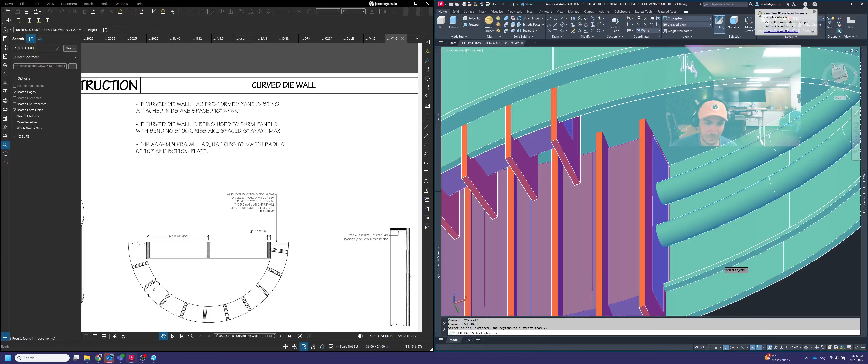And the reason we're doing it in that order - I know this is getting a little hairy here - is we're going to subtract these out from the solid block. The reason we're doing this now is because if we waited till later, you'd have to subtract every rib individually from those tubes to make the wire chase. I don't really want you to have to do that.

So we went back a step here. We found those wire chases and subtracted them from the block of ribs - the legit block of ribs we're using. Now we're going to go back and use interfere one more time. Sorry about that, I need to take a step back.

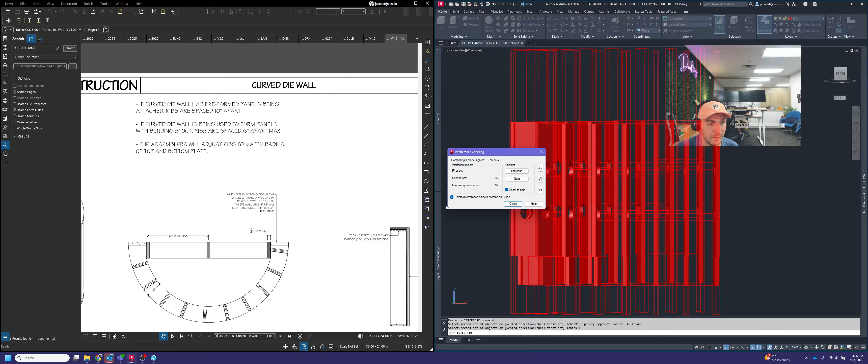So select the block of ribs first, select your dummy ribs second, hit enter, and then uncheck delete interference objects. Remove your dummy ribs, remove your solid block of ribs, and you should be left with a bunch of ribs with wire chases through them now.

All right, so now we're getting somewhere. We're going to unhide and bring everything back. And now if you actually zoom under your table, you can kind of see how that's coming together. It's looking really cool.

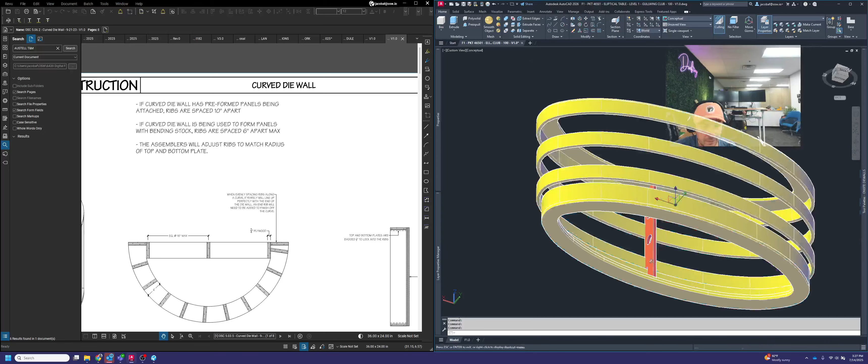We're going to isolate the framing components of the die wall now. So, just like that.

All right, then we're going to mirror the ribs across - or maybe we'll do mirror 3D. It's better to do the safe practice of doing it the right way, so we're mirror 3D-ing these across. So there we go, all right - we got all our ribs in there, looking nice and ribby.

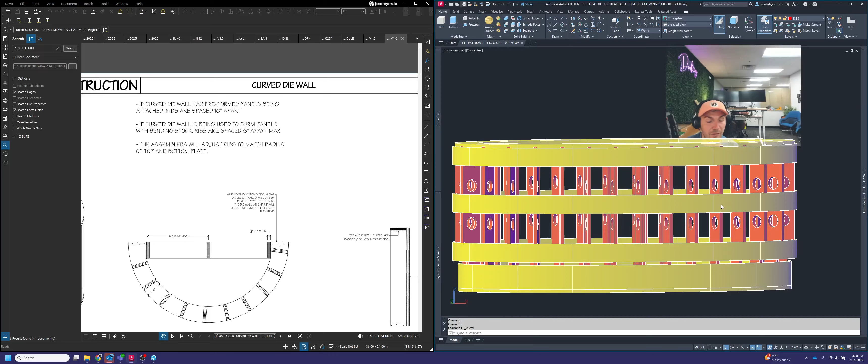Okay, and then what you can do now is, remember how we did the subtract command earlier? Here I'm going to save real quick to make sure I don't lose any data. We're going to be using that again for each one of these parts that has a rabbet in it, starting with the top plate, the base plate next, and then the nailers third. Let's start with those first.

So, top plate and ribs. We need to rabbet the ribs into that top plate. It's really easy to do, but it can be very confusing at first. Because we're using subtract, keep in mind again, if you use subtract and remove an object like this, it's going to delete the original object. You do not want to do that here.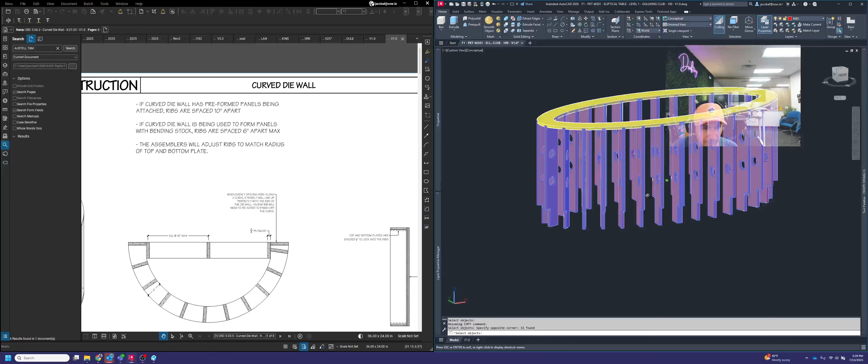So what we're going to do is copy all of our ribs and paste them exactly on top of where they are right now, using the same corner to do that. All right, so - subtract.

Yeah, maybe I should have done this a different way. It's okay, we'll be fine. The way I did it here, I have to click on each rib individually, which is a little time consuming, but it'll be okay. Normally you don't have this many ribs in a die wall, so it's kind of a weird case, but we'll be all right.

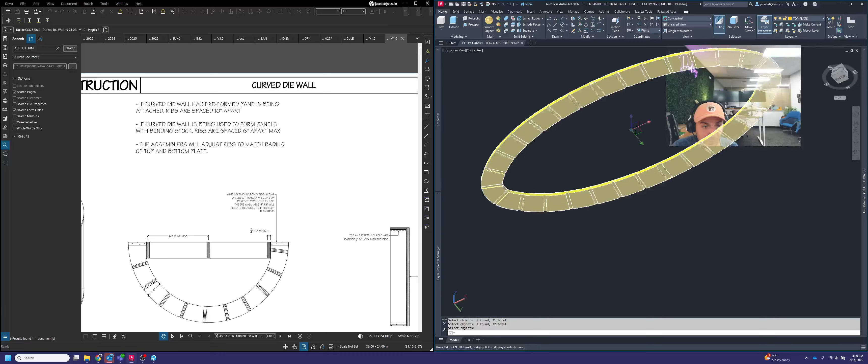Okay, so subtract. Now if I just look at that part, you can see all the little rabbets into that plate, which is exactly what we want to see. There's a little bit of goofiness happening there. I'm wondering if it's happening there too. It looks like it is.

Yep, so we're going to fix that too. But for right now, let's do one more thing. Remember I was saying we have two die walls that are coming together at the middle. I need to make sure that the plates are also separated the same exact way as the ribs. So we're going to separate those with the slice command like this. And now I'm going to isolate these two top plates so that way I can now remove that weird little piece that I do not actually need here.

So solid edit, face, delete.

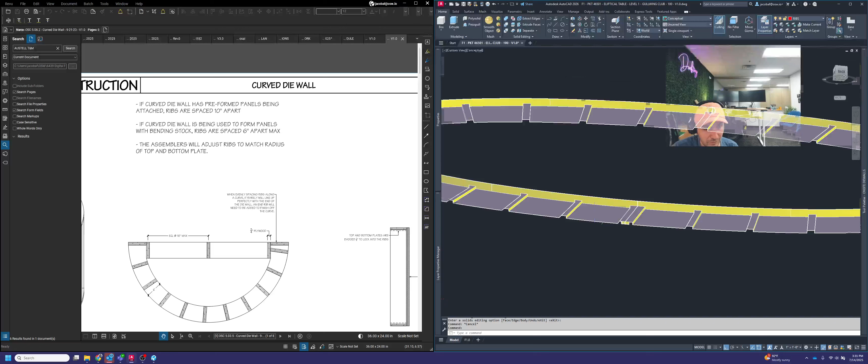I'm going to be doing that all the way throughout. So this side as well has the same problem. Why that happened was that these ribs didn't exactly completely intersect the top plate. So when you're using the subtract command, if you go to subtract something and your objects aren't completely lined up exactly perfect, which this is like off by maybe a 128th of an inch or something very, very small, it'll leave a little sliver of something there. And so you really don't want to keep that in your model. It's better to get rid of it. So that's what I did there.

All right, unhide, let's bring it all back. All right, so we're done with the top plate. We can get rid of that.

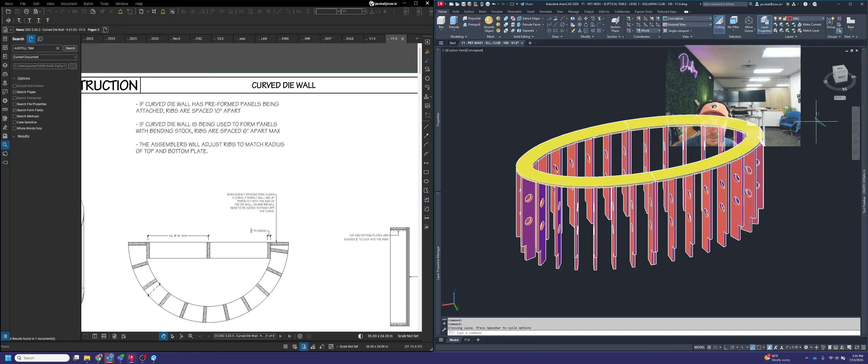Let's go to layer properties and turn on our 3D layers again. And we're going to go up to the drop down now, and we're going to turn off top plate and turn on base plate, because as promised, we're going to be working on that next.

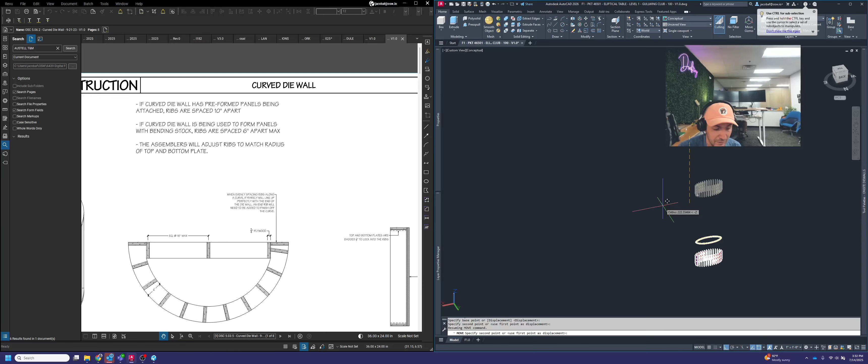So a faster way to do this without having to highlight every single rib for this part is you can copy the ribs somewhere else. For example, if I copy them 150 inches up in the air, I have a secondary copy of them up here. So what I can do now is use the subtract command on these, highlight the entire thing, hit enter, and now I just have to move these down that 150 inches in the Z direction. That way I didn't have to highlight every single one of those individually like last time.

But again, like up top, we're going to slice the base plate in half right there, so that the ribs all have their own separate plates for each half. And I don't have that weird problem with the little sliver of material, so we did something right there, so that's great.

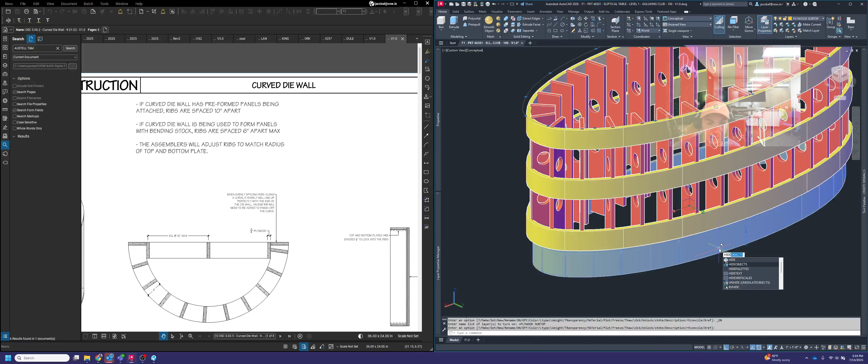Okay, moving on. Like I said, we're going to move from the base plate now to the nailers. Nailers are on that plywood substrate layer. I'm going to hide this one because that one doesn't have rabbets, but these three do.

Okay, so like we did last time, what we're going to do is copy our ribs and paste them 150 inches up in the air like this. Because we have to subtract each nailer individually, what I'm going to do is use the subtract command, highlight that nailer, hit enter, select all my ribs, hit enter, and you can see I'm left with that little ring there.

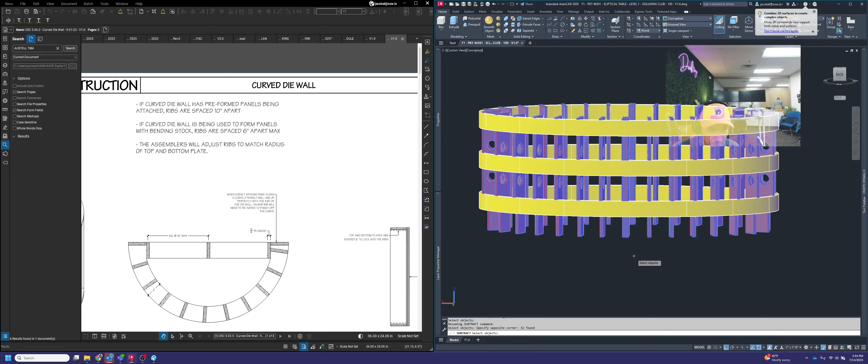Perfect. I'm going to copy these ribs right back down to where they need to go and do the next one. So subtract, and subtract from, we'll grab the ribs, hit enter, and then we need to do that one more time.

All right, here we go. Perfect. Okay.

Copy the ribs, or no, we're going to move them now since we're done deleting them. So move them down 150. And then we just need to slice our nailers in half, just like we've been doing for the top plates and bottom plates. So slice these in half, just like this.

All right, and we should be looking pretty good. Let's go ahead and bring everything back. So look at that—we got all our ribs, all our framing, all our nailers, our rabbets placed in the top and bottom plate, and also in the nailers there. So we're looking really good now.

Okay, so time-wise, we are at... gosh darn, I always forget again where my timer is located.

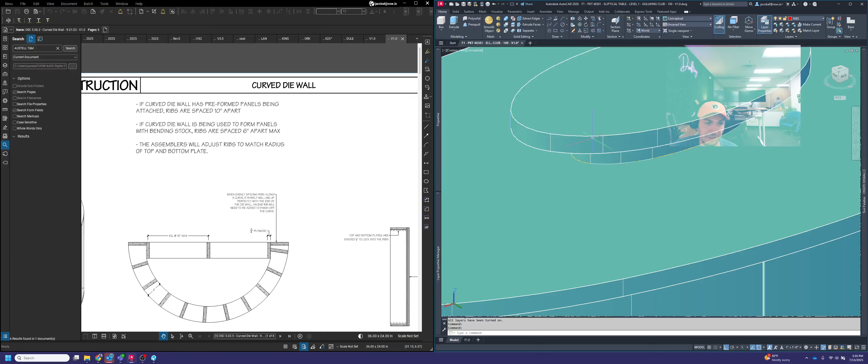Okay, anyway, before we call the model done, we have one more step to do. I think I'll just end up doing that here, so it doesn't fall into a separate video and make things more confusing or broken up. So the last step I want to do with you is add in those ladder frame ribs that go inside of this. So let's hide these objects so we can get to that.

Okay, so we still have our line work for that, which is great. And we're going to be utilizing that line work to draw these in.

All right, let me see if I can get this to work. So I'm going to try to use press pull here. Oh, they don't need that. So I'm using press pull here to try to draw these little ladder frame ribs inside of here.

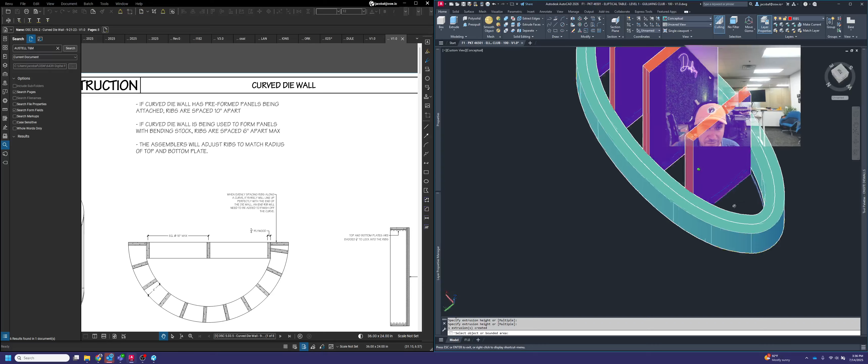All right, now they're all different heights currently as it shows, which is all right, and we're going to slice these apart. You can either slice them or use press pull to readjust the heights. I'm just going to use slice because I like using slice and it's easy for me. So I'm going to use slice, select all the little ribs.

And then it's going to ask you to start selecting points, but I really want to go to 3 points down here. So 3 points, pick a point on the top of that, straight across like this. Delete anything above, boom. Slice again.

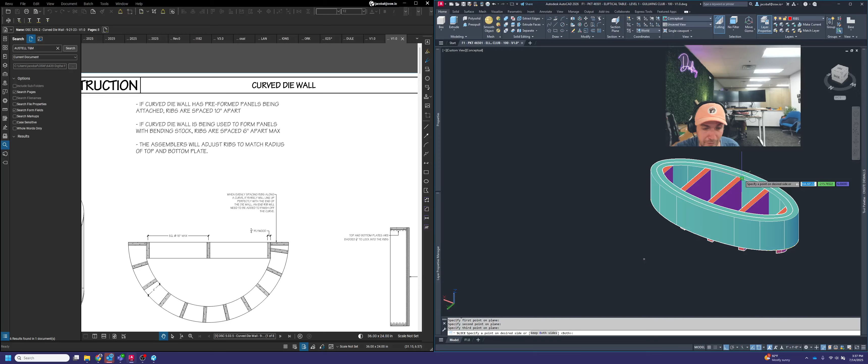We're going to use another 3-point slice down here. We'll select a point at the bottom of our framing here, come straight out, go straight across, and then select a point at the top to trim them back to there. Okay, so that'll work—that'll be a nice set of framing, ladder frames for that area there.

Label this as plywood substrate or plywood subtop. It'll be a layer of 3/8 bending stock, or 2 layers of 3/8 bending stock in there most likely.

Let's label the rest of our layers. So the countertop and the apron is all going to be stone or solid surface, so we'll go STX for that. And we got panels here.

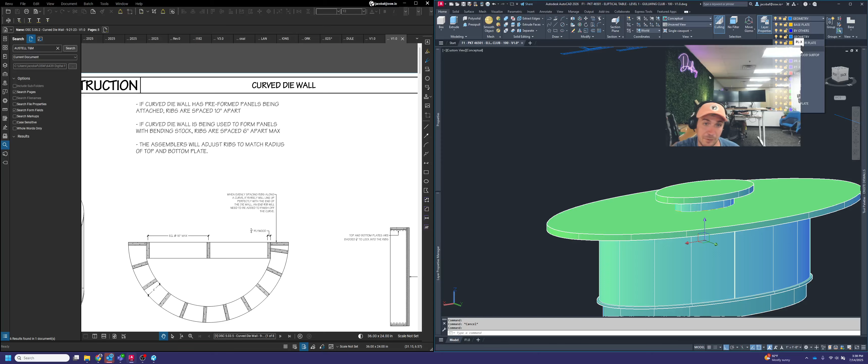And those are metal panels, but let's just see what we've got for layers here. We might have to make a layer. Actually, those ones at the bottom are PLX, but these are a laminate too—they're metal laminate, but we'll make it work.

Okay, let's do that. And then this will be a subtop as well.

Now, the important thing with layer management is you want to be consistent and make sure it's easy for somebody else without any prior knowledge to go in and edit your file, that they're able to do so without having to go hunting down where things are at. So the better layer management, the more organized you'll be in your model later.

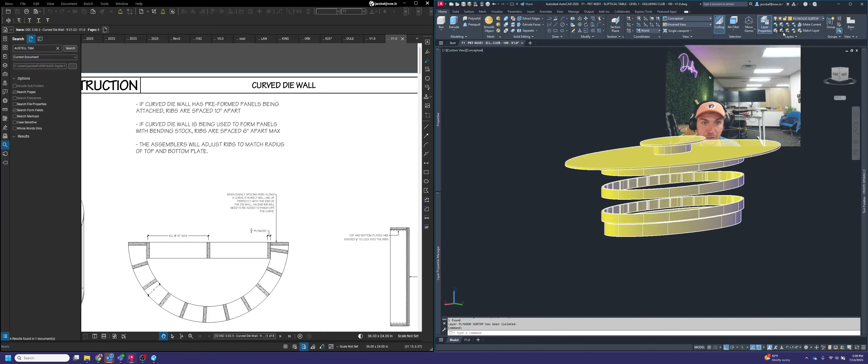So I'm just trying to play around with these, making sure everything looks to be on the right layer. I think it should be. Yep, looks good to me. We got our top ribs up there now, and all our bottom ribs are laid out.

Okay, we're looking pretty good. Well, we're going to leave this video off here. We've got our model complete, aside from the access panel, but we can deal with that later.

And then in the next one, what we're going to do is we're going to plot this thing. I think we can probably plot it in one video because it's pretty simple. Generally, even though it's an elliptical shape, it's a pretty simple drawing for what it is. But we'll talk about how to do flat shots, section planes, and we're going to even get into horizontal sections for this one too, since we haven't really done that yet. So we'll be doing that in this next video coming up.